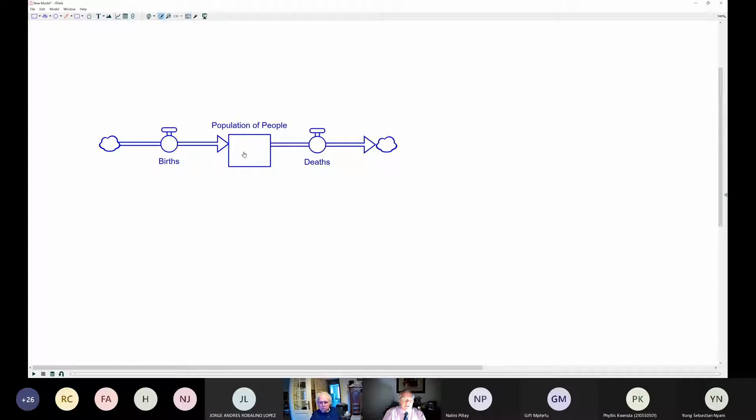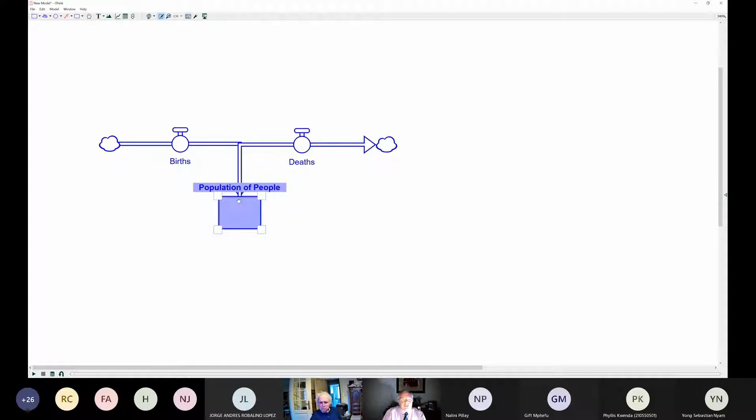So a very important factor that you'll see is I've basically linked this flow, which starts from an infinite source, so I can have as many births as I want to. There's no limitation on that. I've got my births, which will be controlled by some sort of a function, and that then ends up in my population stock. A very important little trick I can teach you is if you move your stock like that, and the flows come with, it means the connection exists. Sometimes you think you've made the connection and sometimes you've missed it. That's a little quick test that I always do to just confirm that I've done all the connections that are necessary.

On the outflow side, we've got the deaths, and again, you'll see here's a cloud. So basically, this is an infinite sink. So we've got enough space to bury whomever passes away. I'm now going to place my 2 converters. The first one, which is my birth rate.

And I'm going to place the second one, which is my life expectancy. And now I need to make connections. So the population we know influences the births, and the birth rate also influences the births. So I've got my first loop basically built up.

If I go to the death side, I know that the population affects the number of people that can pass away, and the life expectancy affects that. And there's our model. So simple enough. We can now start asking the next question. Okay, so next question we have to ask is, how do we make this thing run? Does my model make sense?

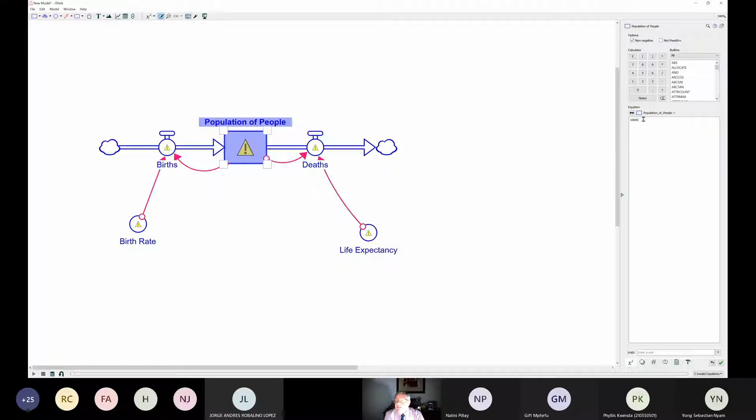I know there's no population that small, but let's just use that to see if we can make the model work. In terms of an equation for our births, this is a simple one. It will say population of people multiplied by our birth rate. So that's an easy one. And then birth rate. This is a more difficult one.

And I said earlier, you need to know your domain. One of the things that I've learned through the years is the more time you spend discussing and asking people in a specific domain about their domain, the better you understand what they're planning to do, and the better you understand the numbers that you need to put in here. So I know quite well what numbers don't work and what numbers do work.

So let's try, just for simplicity's sake, I'm going to say that there's a 2% birth rate. This was actually the South African birth rate in the 1990s, just over 2%. So this is a valid number. If we look at the death side, and again, this is where you need to really fundamentally understand the domain you're trying to model in.

If we were using a death rate, we would use exactly the same kind of equation and say population multiplied by our death rate. Because I'm using life expectancy, I have to think a bit more clever. And the technique we use there is to say population of people divided by life expectancy. And the effective result that you get here is an exponential distribution.

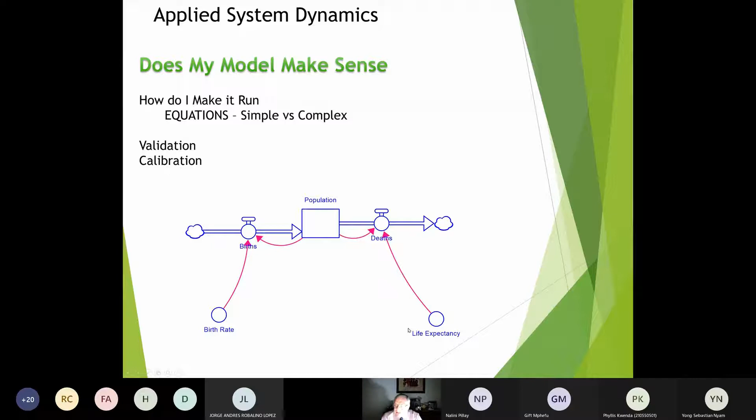So I'm going to go back to the model. Going to go back to my model, and what I want to do now is to put in real numbers. So we've got two options. I can put in the South African numbers, or I think more importantly, let's put in the global population. So we've got a global population of 7.71 billion. I think that's enough zeros. Okay, so I've got 7 billion people. I've got a birth rate of 1.07, and I've got a global life expectancy of 72 years.

And what do we expect to see from this population? I'm actually not sure. This is interesting. This suggests that at the current birth rate, we should see a decline in population over the long term, and that we've already reached our peak. Let me try another round.

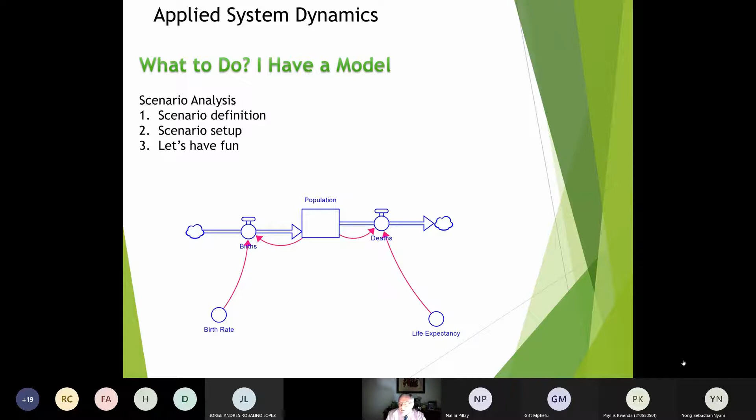And this is where scenario analysis comes in, where we basically want to define what scenarios we want to test. We want to define how to set up that scenario, and then we can have some fun and make things happen. So I want to go back to our model, and I'm just going to do some quick analysis, so don't expect the whole lot. If you want to see the whole lot, please join our modeling competition. During that, I go through this in a lot more detail.

But for example, one of the things that we've put in here is a fixed birth rate. The reality is that birth rate is not really fixed. Birth rate is something that changes over time. So how do we enable that within a model like this? So what I'm going to do is make my variable here time, and then I'm going to create a graphical function that will allow me to put different alternatives in here. And I can say, okay, well, I know my birth rate started at, and I just need to do another little cheat here quickly. I'm going to work in percentages, so I'll divide this by 100.

Sorry? We just have a comment for you. Cello says, how about if you include emigration and immigration? Now we come to the question of what is the domain and the purpose of the model. I am just trying to demonstrate what we can do with this. Am I trying to build a real life model? No. If I'm trying to build a population model of South Africa, and I do not include emigration and immigration, legal, illegal, the whole story, then the model will be insufficient. So if I just use this model and say, plan your schools, plan your infrastructure based on this model, the answer is wrong.

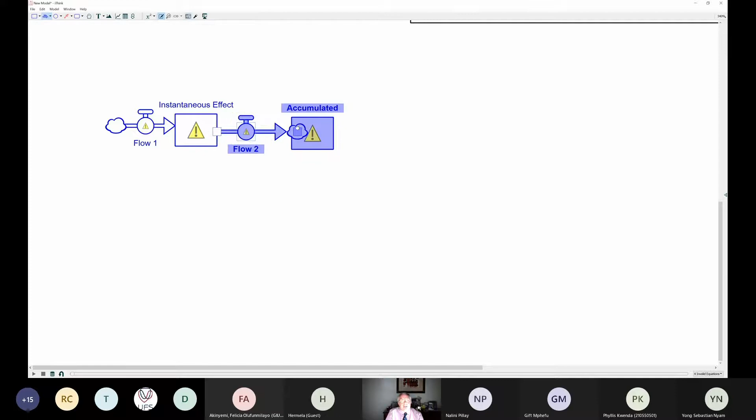Yes. Okay, cool. So I've got two stocks, a thing called accumulated, a thing called instantaneous effect. Got two flows, flow in, and I'll have a second flow. I'm not going to name them, and again, there's my check. My stocks are connected. So this accumulation is very simple. I will always keep this as a reservoir. So it basically says everything that goes in there will stay in there.

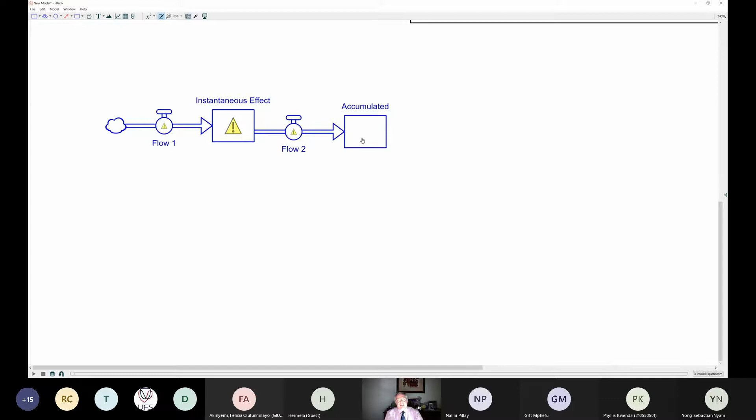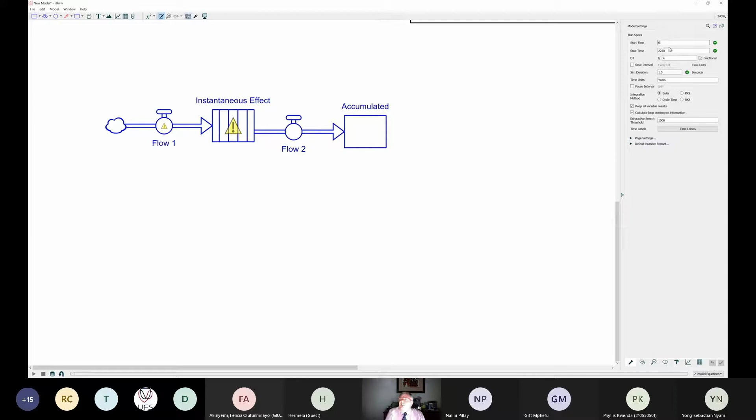If I look at my instantaneous effect, I'm looking for a time delay that will allow me to see what is happening. So the way I do that is I create a conveyor. And what I'll do with this conveyor is I'll give it a transit time of 10 time units. I'm going to have to change my runtime. I'm just going to do this quickly and do 0 to 20. Okay, I'm going to say my initial value here is 0.

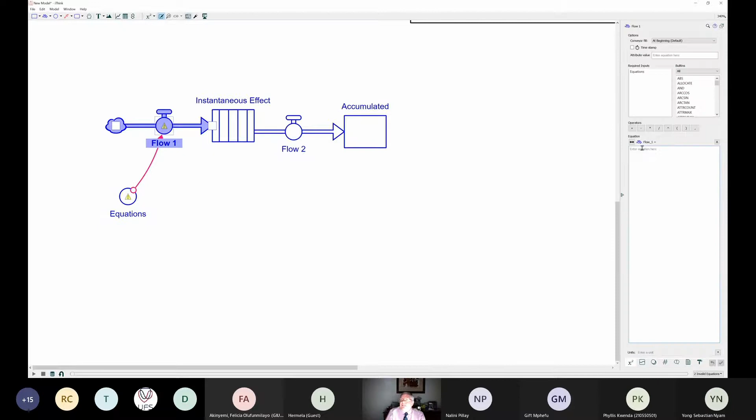And what I can do now is the more visible one, to say this is my equation controller. And then this will just be connected to that. So it's a one-on-one link. You can actually do the equations in there, but then it's not visible what I'm trying to do. So for example, let's get a graph here quickly. On the graph, I want to, sorry, is there a question?

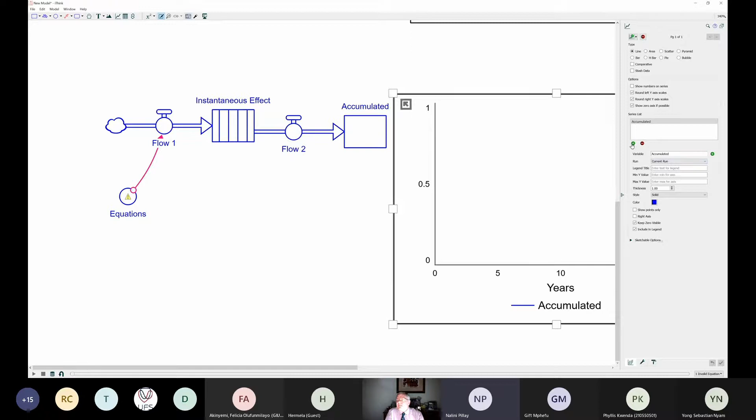Oops. I think that there's some in the chat, which I think Corne's been able to answer. So thank you, Corne.

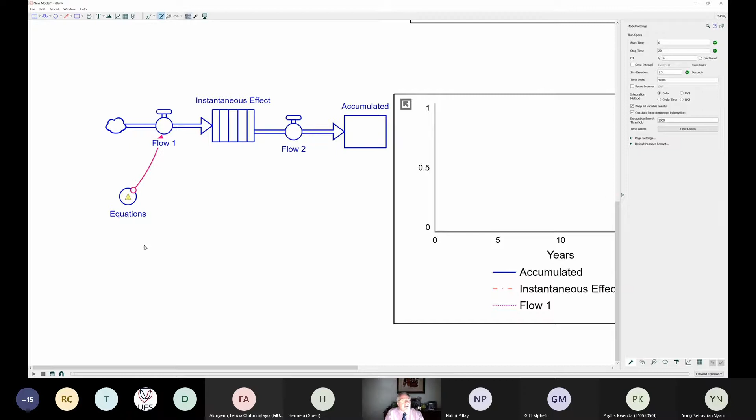Okay, so what I'm going to do now is to just check my accumulated, my instantaneous effect, and I want to check flow 1. Okay, so if I, for example, say, I'm just going to use a simple equation to say if time equals, oh, sorry, I can't see my keyboard, equals 5, then 10, else 0. So what do we expect? We expect to see a value of 10 going through the flow. It should go through the instantaneous effect, and it must go into the accumulator.

Okay, can we quickly have a poll? Who says yes, who says no? I'm saying no. Look at this answer. It actually does not get to that value, because what is happening here is I am putting in an instantaneous number. That instantaneous number is 10.

In the flow, it gets multiplied by dt, which is in this case 0.25 or 1/4. So the net effect is, while this pulse or this flow is equal to 10, the actual number that flows into my instantaneous effect is just 2.5, because it's 10 times 0.25. And then my accumulated stays constant.

So let's see what happens if we do this and we say if it is greater or equal. I expect that to increase now. And there you can see how it goes up until I've accumulated my full amount in my instantaneous. Because remember, it's been fed now.

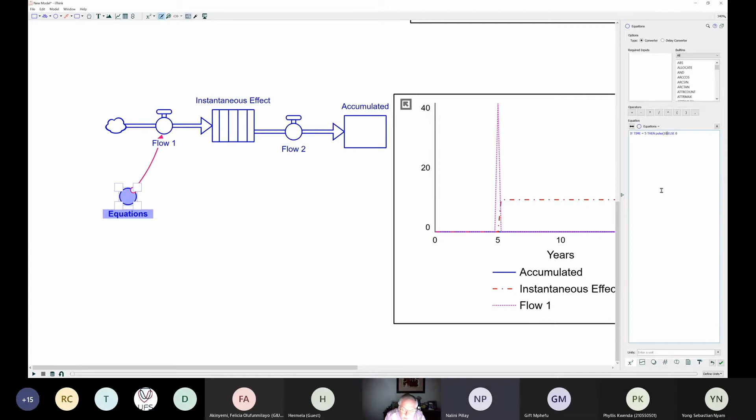Sorry, Andres, if you can perhaps conclude, because I see. Yes, I am. This is now my last one.

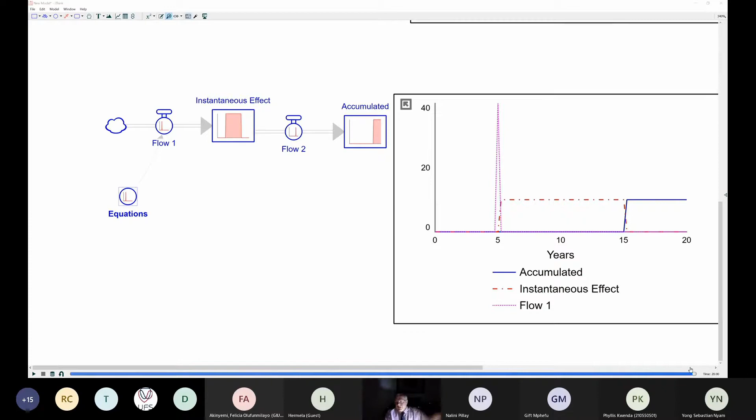So all I'm saying is, guys, this is a nice little tool. Put it together, and it allows you to test any of the functions, whether it's a complex function, or if you want to see if the random number generator is really random. That is actually quite a useful tool to do that. And the answer is no, it's not really random. So again, if anybody is interested, you can contact me and we can discuss this little tool. I think it's a useful thing for just knowing what's happening in the software.